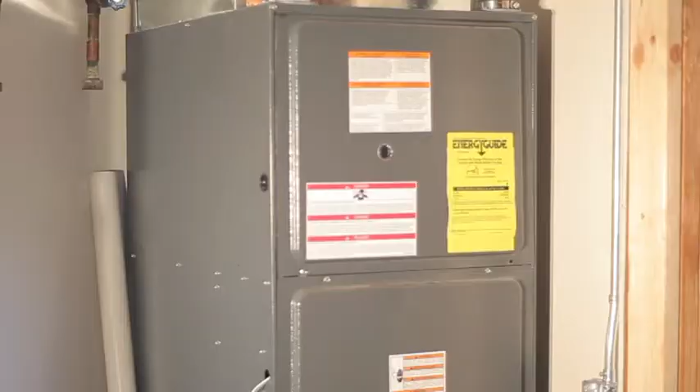The Michigan Uniform Energy Code went into effect in March of 2011, and this updated code really emphasizes the building's thermal envelope. There's been a couple of major changes to the code. First, it requires higher levels of insulation. And second, putting in a more efficient furnace can no longer be used as a trade-off for putting in less insulation. Having a better furnace isn't going to help much if those energy savings are then wasted through poor insulation.

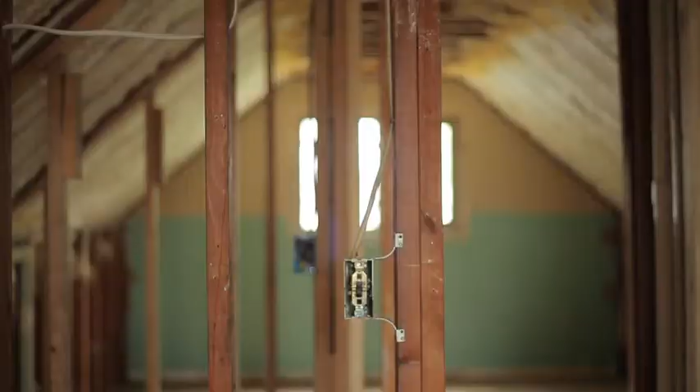The code requires verification of all of the building insulation. So to comply, the builders need to get insulation inspection after the rough inspections are done, but before the drywall goes up. The purpose of the insulation inspection is to make sure that the builder correctly installed the insulation specified in the permit application and according to the manufacturer's specifications.

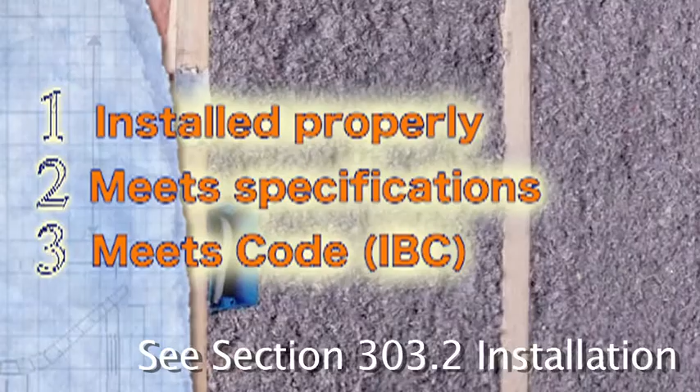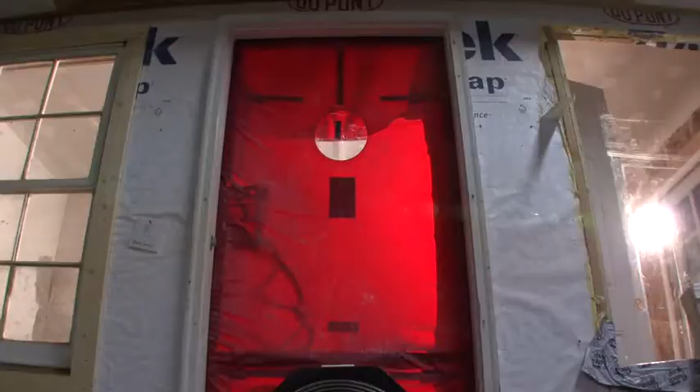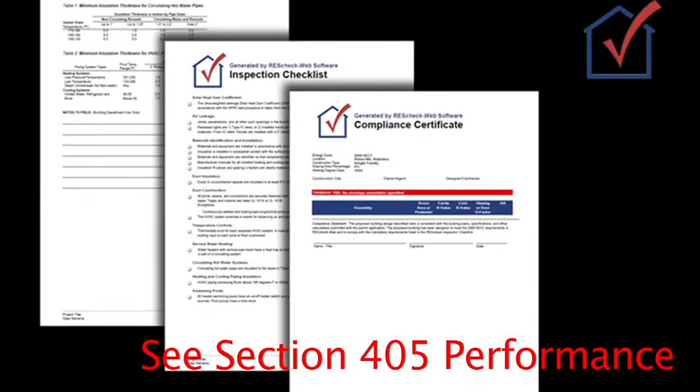And although the code no longer allows for trade-offs for a high-efficiency furnace, the builder still has the option of using the performance approach. With the performance-based plan, the inspector may see insulation or U-factor levels that are higher or even lower than what is prescribed by code. And that's okay as long as the levels match what is indicated in the passing report produced by any of the approved programs used to demonstrate compliance.

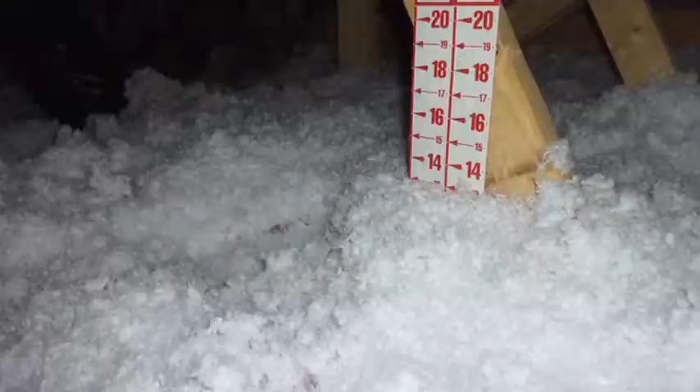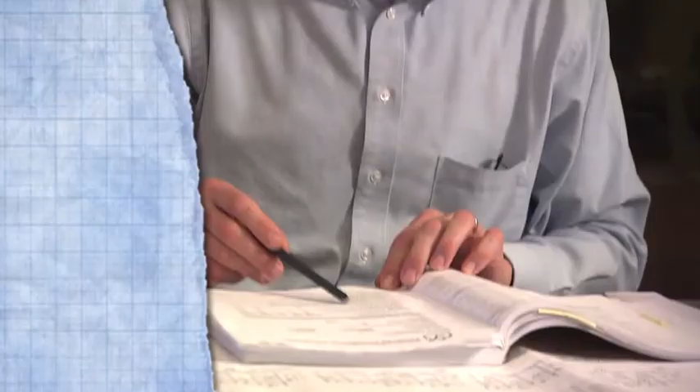Let's take a look at what needs to be checked. In this inspection, the inspector makes a visual confirmation that the required insulation has been properly installed and makes sure that the entire building thermal envelope is insulated. To put it simply, we want insulation between every indoor space that connects to the outdoors. The inspector will check 5 areas of the building envelope: the attic, the side walls, under floors, basements or crawl spaces, and all of the fenestrations.

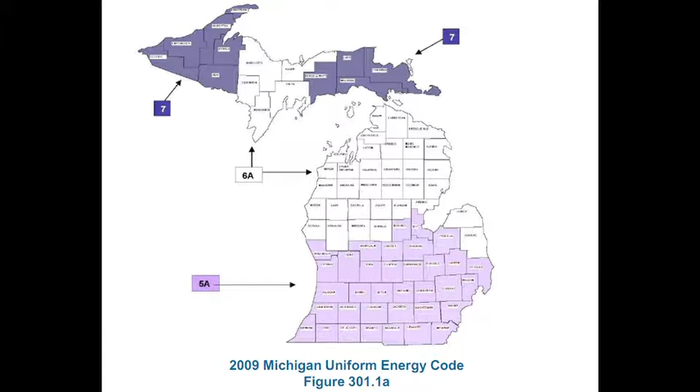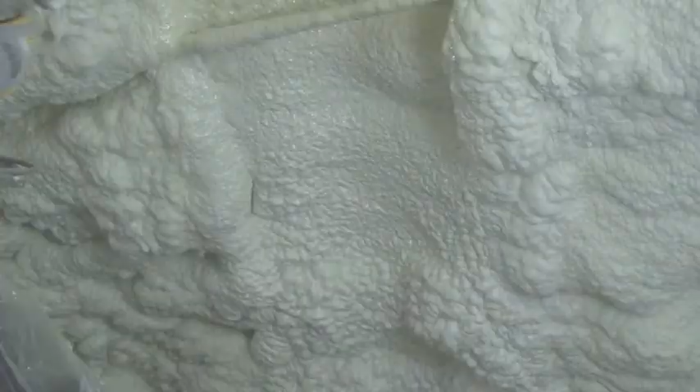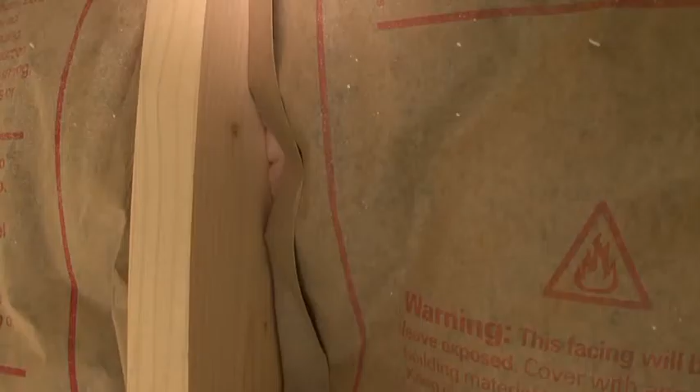First, let's take a look at the attic. Under the prescriptive approach, R values in the attic should be at least R38 or R49 in the northern parts of the state. Now, there are many types of insulation. The 3 most common are fiberglass batting, spray foam, and cellulose. If the contractor is using fiberglass batting, you need to make sure that the batting completely covers the area, that it's tight with the edges to the interior, and it's properly secured. Now, the batting should not be compressed since that reduces its effectiveness.

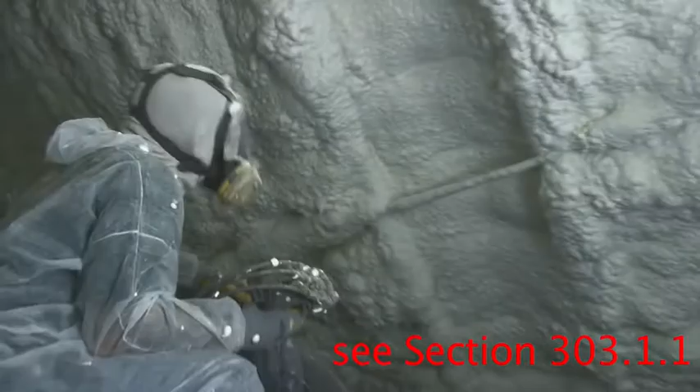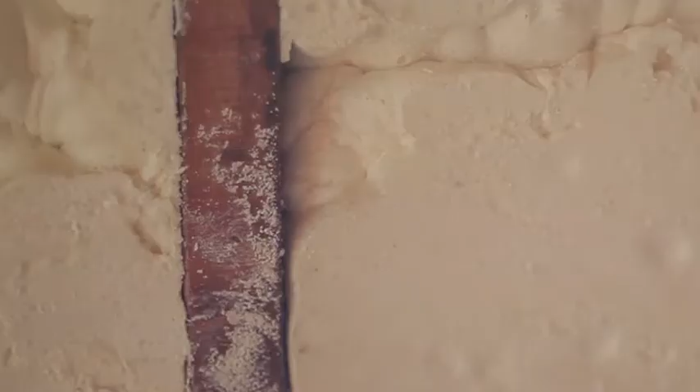If the insulation installer used a sprayed-on or blown-in material, they must supply a certification of the material installed and the R value. The inspector should verify the thickness of the material installed and calculate the total R value. A spray foam that will end up behind drywall should carefully be leveled to maintain depth from rafter to rafter or stud to stud. Any indentation between the rafters really reduces the R value.

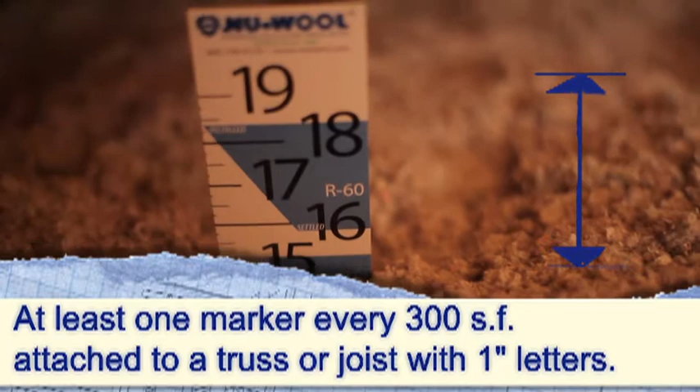Blown cellulose installed horizontally in the attic should have markers placed at regular intervals, noting an even depth throughout. 1 marker should be placed right at the attic access opening to verify that the markers are the proper height. Now, in all instances, make sure that all the ventilation pathways are clear of obstructions and are open.

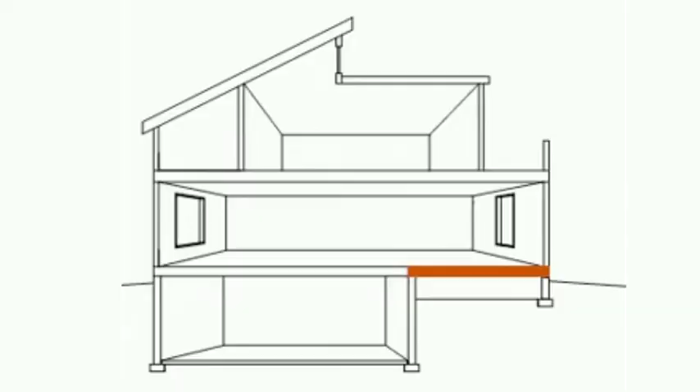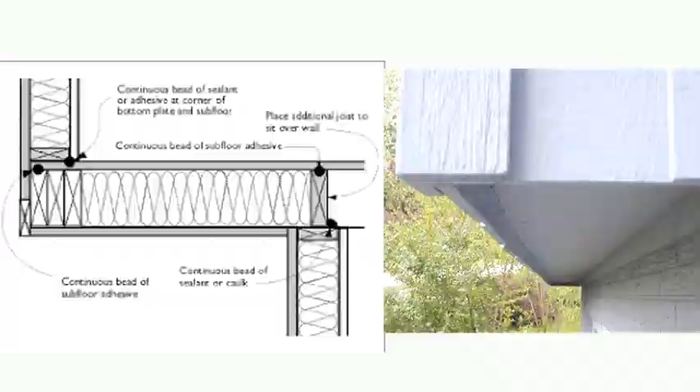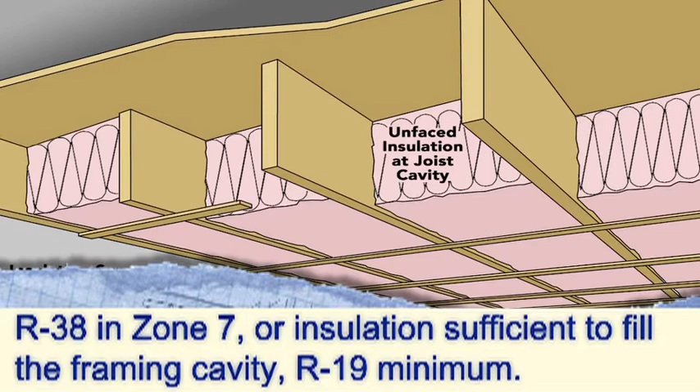The underside of floors are required to be insulated when they are over an unconditioned space. Now, this would include areas above a garage, rooms where the floor is cantilevered over outdoor air, a crawl space vented to the outside, or an unconditioned and uninsulated basement. Floors over an unconditioned space must have an R value of 30. And as with the walls and the attic, you need to confirm that there's a proper fit, proper R value, and proper material for that application.

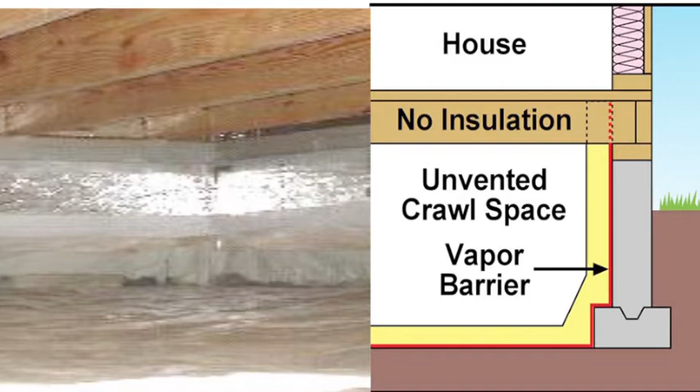Now let's take a look at the crawl spaces and basements. As an alternative to insulating floors above a crawl space, there's the option to encapsulate the crawl space by closing the vents, insulating the walls, and installing a Class 1 vapor retarder on the floor. Now, crawl space walls can be R10 continuous or R13 stud cavity insulation for all Michigan climate zones.

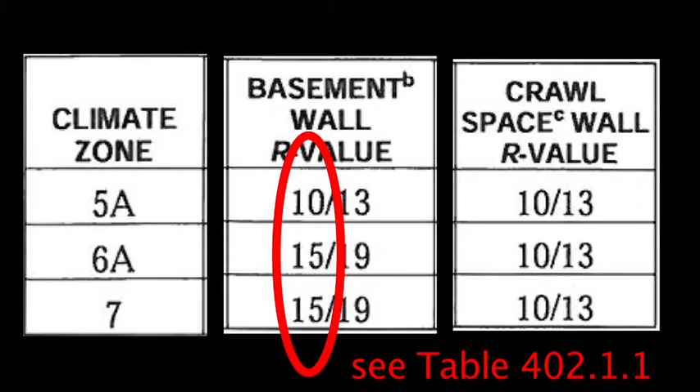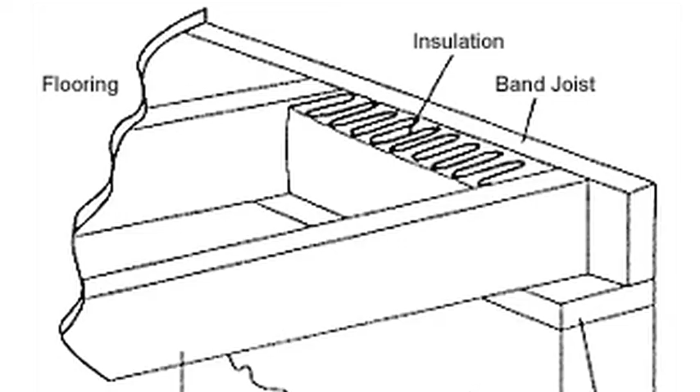Depending on the climate zone, basement walls must have a minimum R10 to R15 continuous or R13 to R19 stud cavity insulation. In a basement, wall insulation should extend from the top of the basement wall to the floor or 10 feet below grade, whichever is less. Now, this inspection also requires verifying that the band joist is insulated above all of the exterior walls.

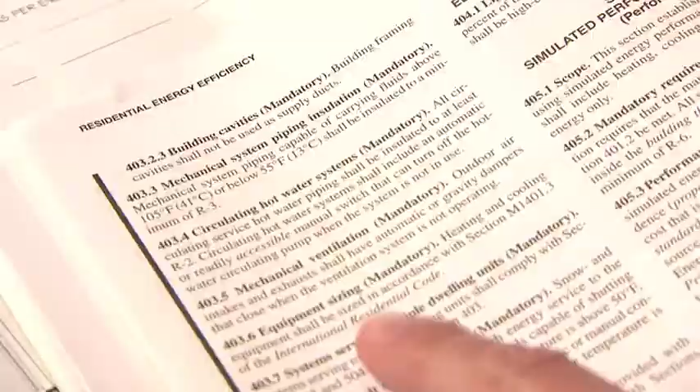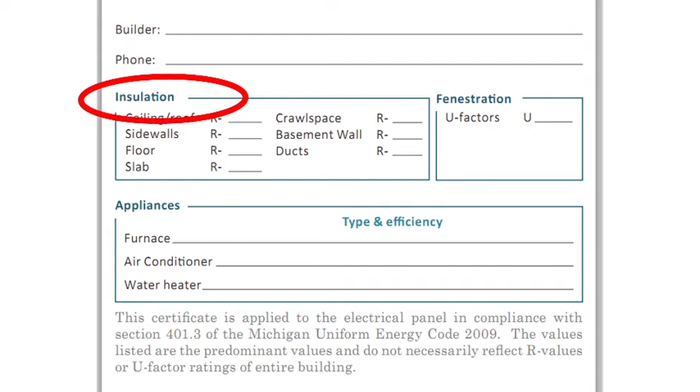Now, at this point, the inspector has verified that the plan matches the actual installation and that all the work meets code requirements. But the new energy code adds an important last step with regard to insulation, fenestration, and appliances. The builder must complete and attach a compliance certificate to the electrical panel, noting the predominant insulation in the ceiling, attic, walls, and foundation, and the U-factors for all fenestrations. The certificate should also note the type and efficiency level of the furnace, the air conditioner, and the water heater. That concludes the insulation inspection.

A thermal bypass checklist, such as the one provided by the Energy Star Home Rating Program, can be a helpful tool to make sure that all of the areas are checked.